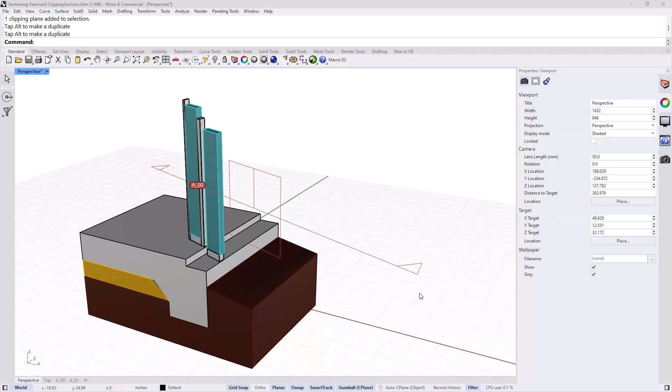Before we know it, we're actually pretty advanced in understanding the clipping planes and the new properties associated with it here in Rhino 8, but there is more. There's the ability to assign what we call section styles to different objects. So objects have colors, have line width, have all sorts of properties, materials. But now we can add another property to our sections.

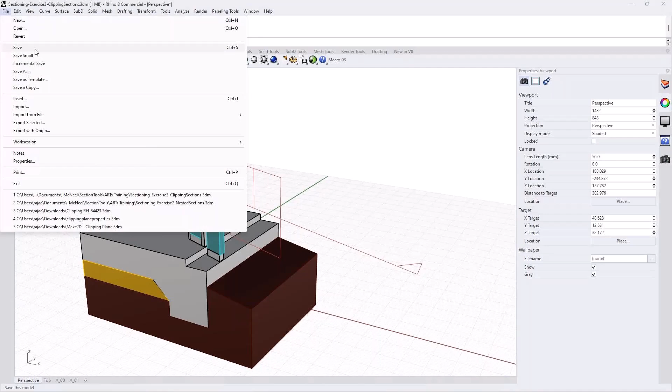I will now open the next model, which is the section style exercise 4. In this model, the only difference from the other one is I don't have colors so that I don't distract from seeing the different hatch patterns, but it has the two clipping planes or clipping sections set up, as you can see.

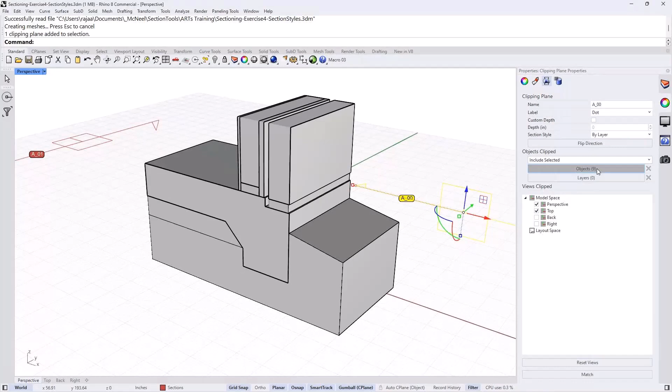If you select on A0, you see that's the name, the label, and if you observe, it is also clipping through 9 of the objects, which are like all the objects here. So let's see if we can move that. Yep, it's basically clipping through all the objects.

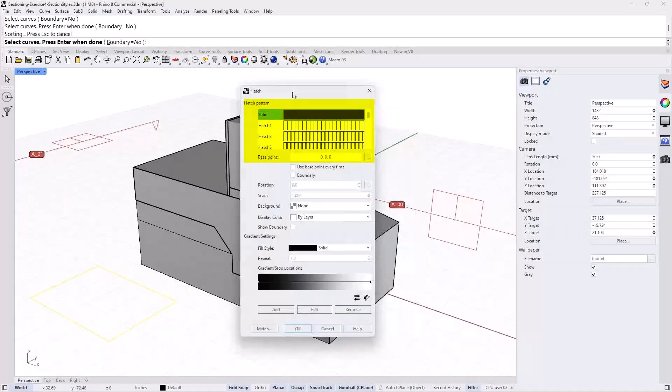Let me just run a test. So I'll do a rectangle and see what kind of hatch styles we get when I run the hatch command. You can see that the hatch table shows the standard Rhino hatch patterns. But if you look at this particular file, it has 4 more.

Hatch styles here. It has the earth, and this one is used for like pavements with the sand, with the concrete, small. We have a few hatch patterns that are not available directly with Rhino, but have been saved to this particular file. However, I have included in the handout how you can actually import them.

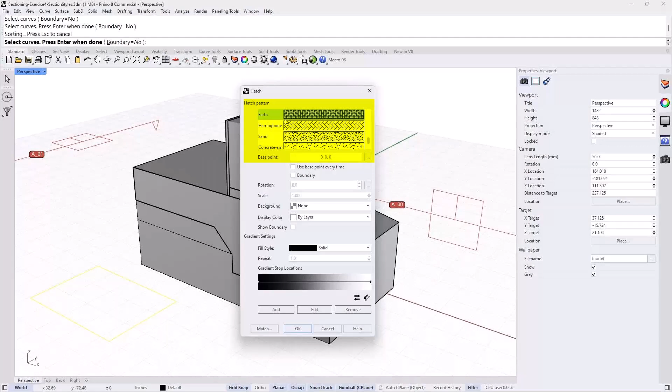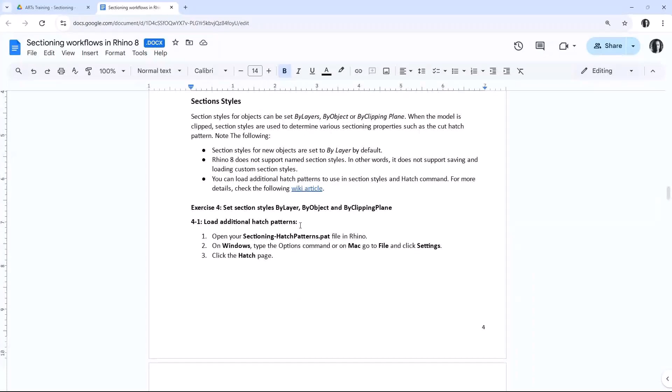There is a whole wiki article, let me show you that, to show how to load new hatch patterns, and you can see it in here. You can link to it. Mary wrote that article, and it has that file, which is the Rhino hatch file, and additional hatch if you want. You can get your own, and the step-by-step on how to import new hatch patterns into Rhino.

When you save a file or you save a template, you can have these hatch patterns, and they will be accessible from all other objects, if you will. So since we have the hatch patterns, I'm not going to go through that process. You can go through it, follow the steps if you want to upload it to a new file as well. And it's also available to you in the handout itself.

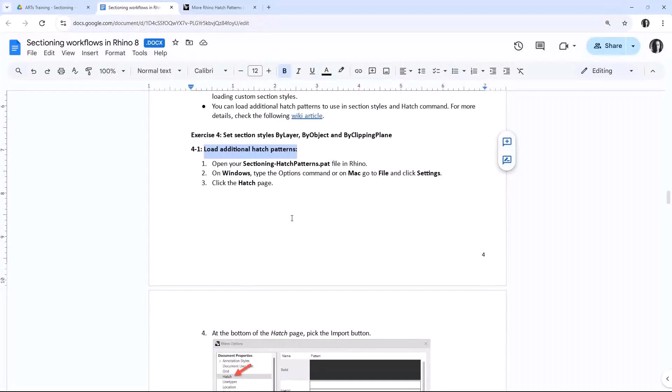How to load additional hatch patterns in case you are starting with a new file or you want to save a template: you go to the hatch, you import, pick the file and all the hatches you want to import, and pick OK. So that's basically what the process is. So now...